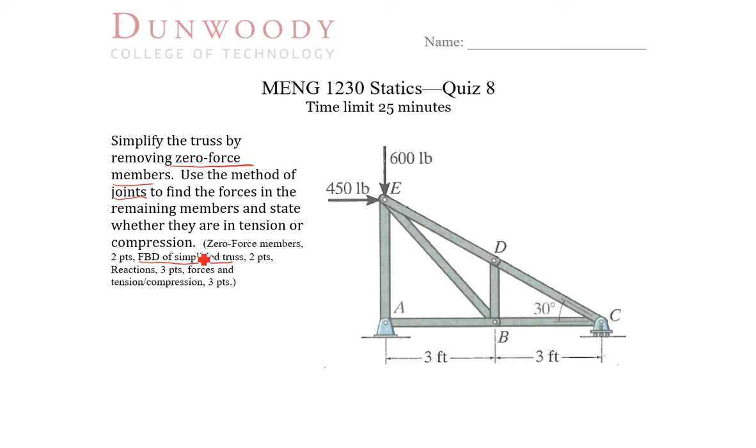or compression. So looking at our diagram here, as we know, if we have a joint with 3 members and 2 of them are collinear, as is the case here for ED and DC, that third member must be zero force. So if I had a force acting, I'm going to draw them in tension here. If I had DE going that way and CD going this direction, they have to be equal and opposite, so there can't be any force here in BD, so I'm going to get rid of that guy.

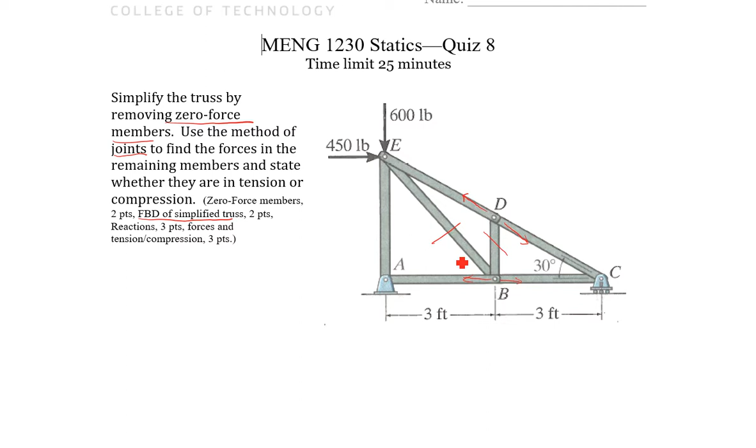And then, now that I've only got 3 members at joint B, I have the same situation, that BA and BC have to be equal and opposite to keep joint B in equilibrium, and therefore member EB is zero force. So I get a point for each of those zero force members. I'm just going to write those out quick. Zero force equals BD and BE.

So my new free body diagram is going to be this thing, where I've got 6 feet. I don't have a height here. I have 30 degrees. I'm applying 450 pounds to the right, and 600 pounds down. This is joint E. I have AY, AX, and rollers at C, so we have NC. There's my new free body diagram.

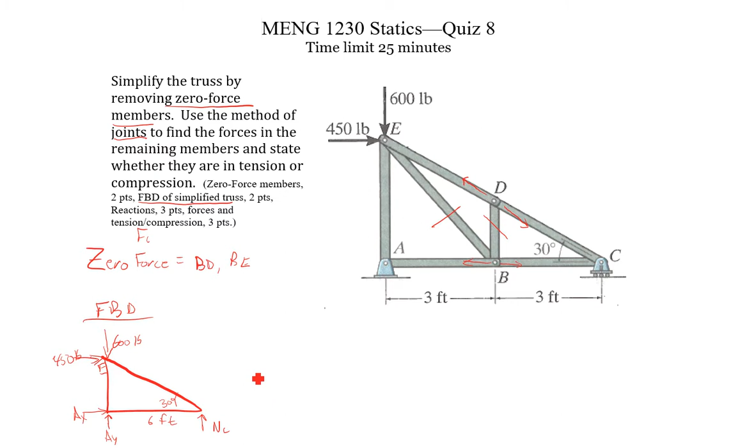So I may want to know what these heights and whatnot are. I could do that. So if I have 6 feet here, 30 degrees in this angle, finding this side here is 3.464 feet, and this hypotenuse is going to be 6.928 feet. So it would be 6 over the cosine of 30, and this would have been 6 times the tangent of 30 there, opposite over adjacent.

Alright, so now that I've got my free body diagram, I can do my reactions. So I'm going to start with my moments around A. So I have 6 times NC, that's going to be a positive moment. The 600 pounds goes right through A, so it doesn't create any moment, and my 450 pounds is going to give me a negative moment, and it's again 3.464 feet away times 450 pounds. So NC is going to be this product divided by 6, or 259.8 pounds.

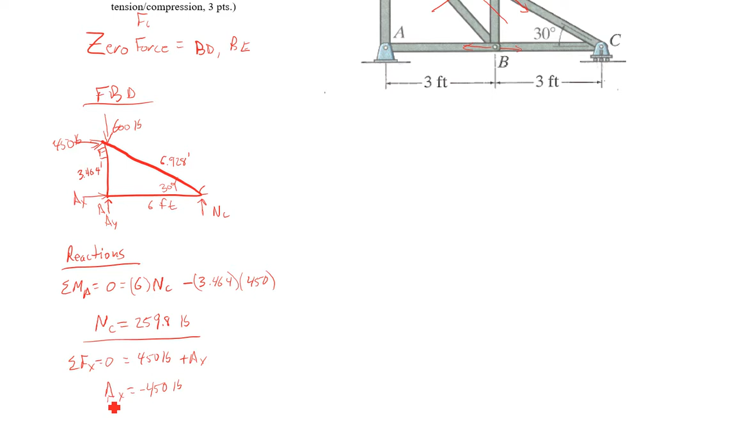Now I can do my forces in X. So I have 450 pounds plus AX. Obviously AX is going the other direction, so negative 450 pounds. And then last, sum of forces in Y. So I have negative 600 plus 259.8 at NC plus AY. So AY is 600 minus that, so I get 340.2 pounds. There's my 3 reactions.

And now we can do our method of joints. So I can choose which joints I want to act on. If I start at joint A, here's FAE, FAC, AY is acting up. This is AY, and AX is acting to the left. It was negative 450. So pretty clearly, sum of the forces in X equals 0 equals negative AX plus FAC. FAC equals AX. So FAC equals 450 pounds. And that will be acting in tension, right? It's going to be acting to the right to oppose my AX.

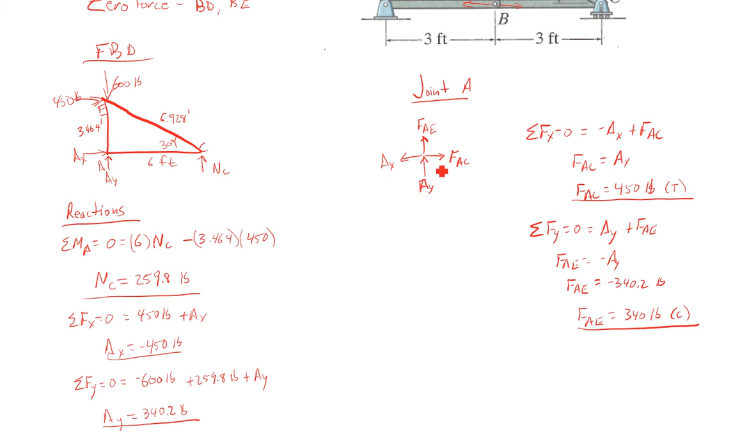We've got 2 of our 3 members, and then last we can go to either joint C or joint E. I've got one of each member here. I'm going to do joint C. I have my reaction there. AC was in tension, so I'm going to continue drawing that in tension. This is FAC. I'm going to draw FCE. And that's 30 degrees. And then my normal force here is NC.

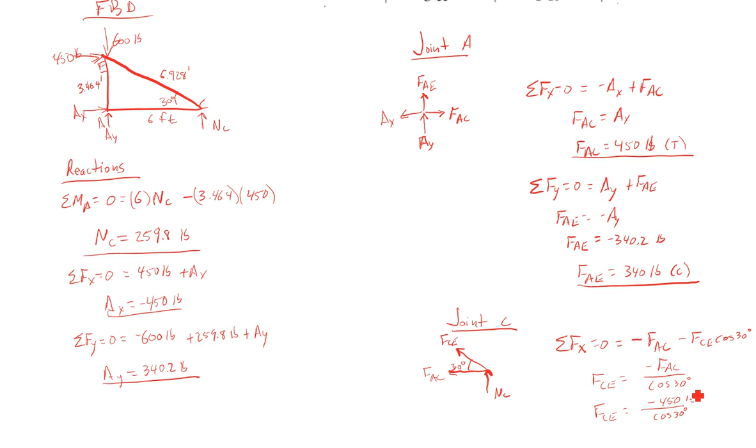So I'm going to set sum of forces in X equals 0. So I have negative FAC minus FCE cosine of 30. So FCE equals negative FAC over cosine of 30. And it's pretty obvious that one of these has to be the other direction. I already found AC to be in tension. So FCE equals negative 450 over cosine of 30. Let me scroll a little bit. FCE equals negative 519.6 pounds. So it's going to be in compression. 520 pounds in compression.

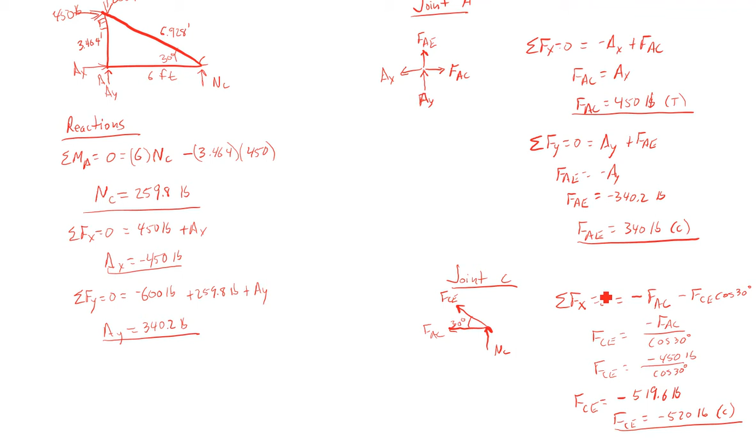So my summary, I'll just squeeze it into the bottom here. FAC, 450 pounds tension. FCE is negative 520 pounds in compression, and FAE is 340. I don't need a negative sign in front of that for my compression. 340 pounds, also in compression.

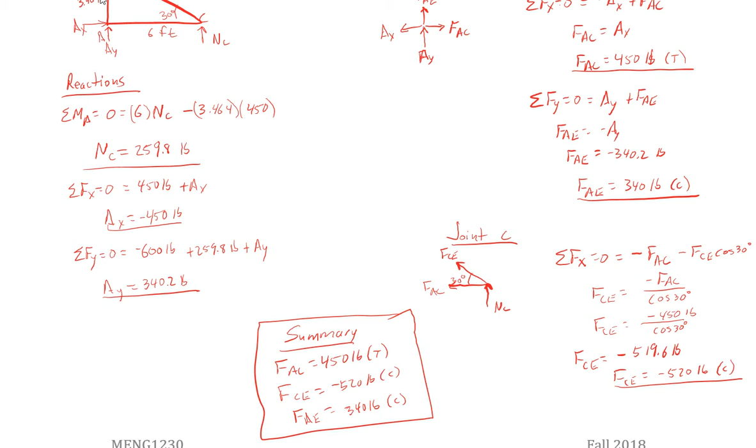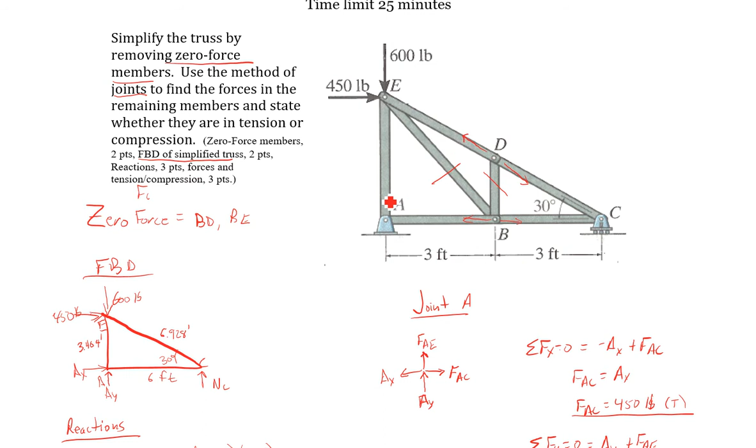So our approach, again, identify our zero force members. That made things a lot simpler for us. We only had 3 members to find instead of 5. We could have left them in. We would have found them to be zero force. It saved us a little bit of work. With our simplified truss, we find our reactions after we have drawn our free body diagram, and then we just start working at the joints.

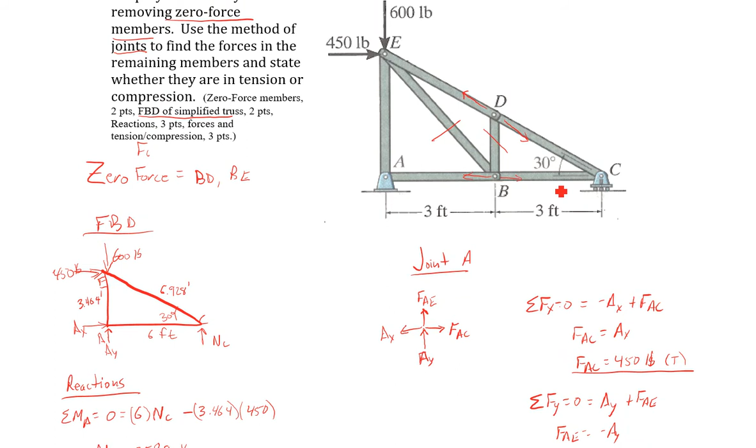So we only had 3 members to find. We only had to do 2 joints. I chose A and C. You could have done A and E. You could have done C and E. It's your choice. And then I summarized that. So we found 2 in compression and 1 in tension.